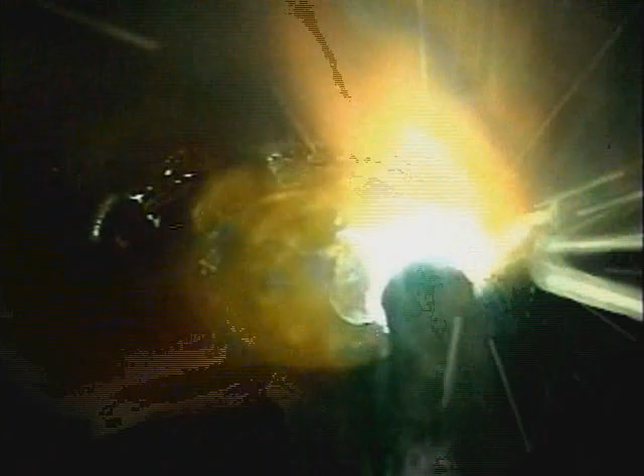From fabrication and repair shops to backyard garages, arc welding is one of the most common and versatile methods of joining metal. This is the SMAW, or shielded metal arc welding process.

Electric current from a welding machine produces an arc between the base metal and a consumable electrode, which is the welding rod. That arc burns the flux coating on the rod, creating gases that shield the weld area from coming in contact with oxygen in the air.

The gases surrounding the arc are superheated, causing the base metal to melt, while the filler metal from the rod is being deposited into the molten puddle.

Whether you're learning to weld to build something or make repairs, the first step is to learn how to consistently run a good weld bead. Before we start burning rod, though, there are a few things you should know about the equipment we'll be using. So let's begin with the welding machines.

The job of a welding machine is fairly simple, and that is to provide a steady, controllable current to the electrode. Regardless of the size or shape, welding machines will provide either alternating current or direct current to the electrode. And this little machine gives you the choice of either AC or DC.

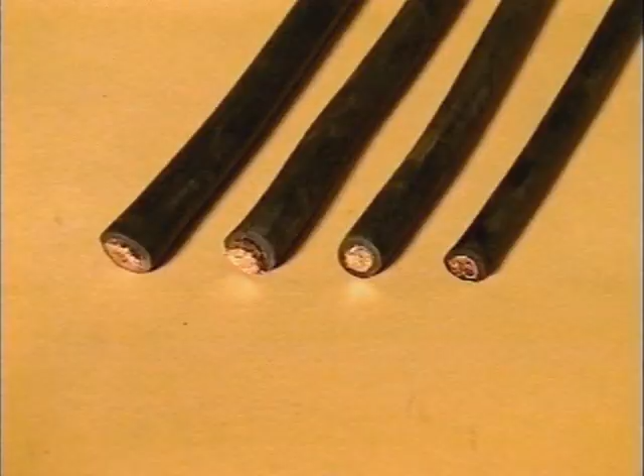Welding leads are insulated copper wire and come in sizes like a number 4, 2, 1, and single aught. The larger the number, the smaller the diameter. The size welding lead you need to use depends on how many amps you'll be using and how long the lead is. And welding supply stores have charts to determine the size lead you need to use.

On the end of the main lead, I use a quick connect with about 15 feet of number 4 lead and the electrode holder. This is called a whip. The smaller lead is a little more flexible and easier to deal with.

This is a 200 amp electrode holder. Larger ones like 250 or 300 amp are available if you're mainly using big rods with high amperage settings. But for general use, the 200 amp is more comfortable. And I usually call this the stinger.

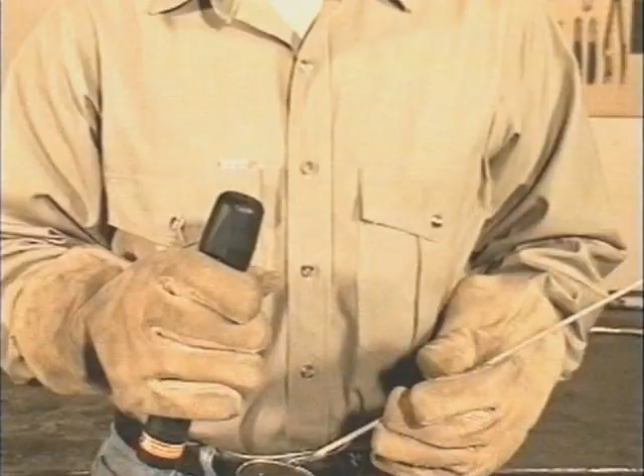Another type of electrode holder is available where you stick the rod in and twist the handle. If you need the rod at a different angle, you can just bend it. You also need a ground clamp, and I use a quick connect here too, in case I need to add more lead.

Now, the light from arc welding is extremely bright. You need filter lenses both to be able to see the molten weld puddle and to protect your eyes from getting burned. These are typically available from a number 8 to a number 14. The lower the number, the lighter the lens. From what I can tell, some people are more sensitive to this light than others.

A number 8 filter lens is way too light. Industry recommends a number 10, and I use a number 9. The lens has to be dark enough to protect your eyes, but light enough so you can clearly see the weld puddle. If you're welding with big rods using high amperage, you may want a shade darker lens than normal. And if this filter lens gets chipped or cracked, replace it.

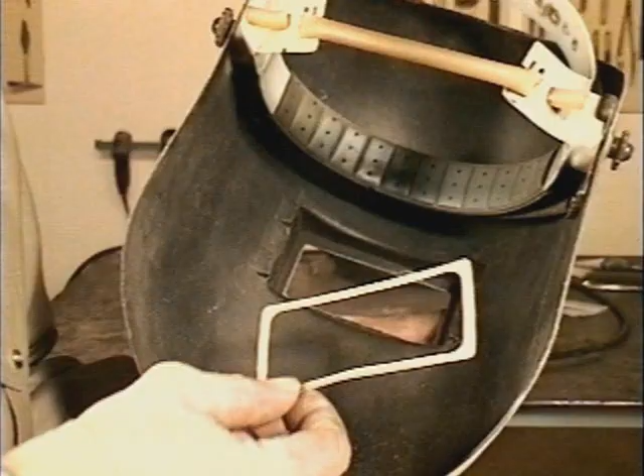To protect the filter lens from sparks or getting scratched, I use clear plastic lenses in front and in back. There's a gasket that goes in first to seal the lenses, and everything's held in place with a clip. After you install the lenses, hold the hood up to a light and check for leaks around the edges.

When you start welding, check it again. If any light from the arc is leaking around the edges of the lenses, it'll burn your eyes for sure. Also, replace the clear lenses when they get dirty or scratched. Having a clean lens makes a big difference in allowing you to clearly see the weld puddle.

Okay, the last thing we need are welding rods. So let's take a look at some of the common ones. Some of the more common welding rods for carbon steel are E6010, 6011, 6013, and 7018. And the numbers are written right on the rods.

These numbers actually mean something, so let's take a look at E6010. The E designates an arc welding electrode. The first two numbers, in this case 60, indicate that the filler metal has a tensile strength of 60,000 pounds per square inch. Depending on certain conditions of the weld, you may get a little more or less, but it'll be close to that. The 70 in 7018 indicates 70,000 pounds per square inch. So the first two numbers indicate tensile strength, and tensile strength is the force it takes to pull it apart.

The third number indicates the position the rod can be used in. A number 1 shows that the weld puddle solidifies quick enough so this rod can be used in any position: flat, vertical, horizontal, or overhead. A number 2, like in 7024, indicates that the molten puddle remains so fluid this rod can only be used in the flat position or for a horizontal fillet, which is more or less flat.

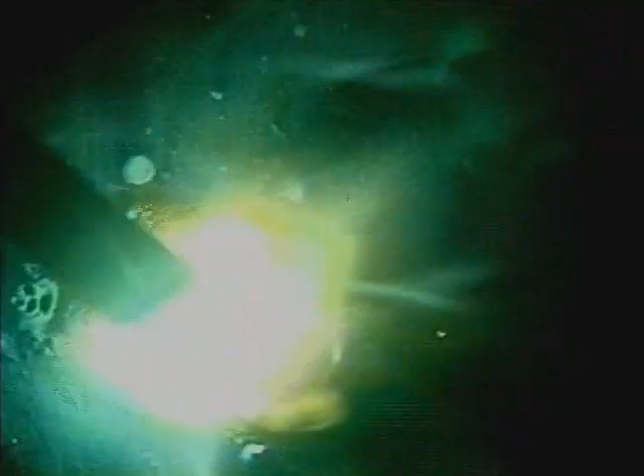The last two numbers together, here it's a 10, indicate the composition of the flux coating. And this flux is what makes the whole arc welding process possible. As it burns, a gas is created that purges the weld puddle, keeping the oxygen in the air from mixing with the molten metal, which could cause gas pockets in the weld bead called porosity. The flux also helps stabilize the arc, and it lifts impurities from the molten metal. When the flux cools, it forms a slag coating over the hot weld bead, providing more protection from the air.

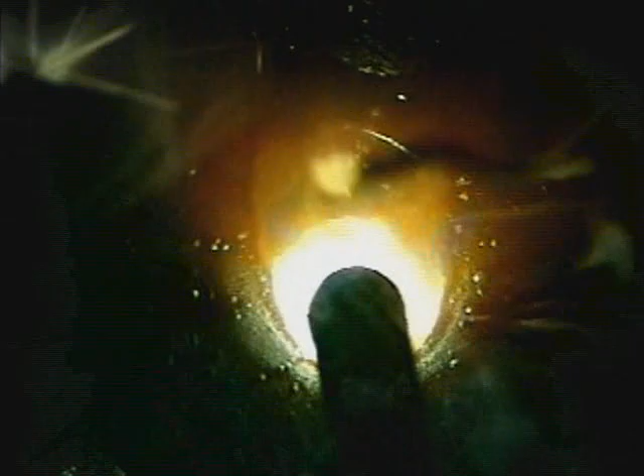There isn't a magic welding rod that just does everything. You may find one that you like to use, and that produces good results. But basically, welding rods can be put into one of two groups: fast freeze or filler. The fast freeze rods, 6010 and 6011, have a strong arc force that provides deep penetration. A light flux coating makes the molten weld puddle clearly visible, and the weld puddle solidifies relatively quick, leaving distinct ripples in the finished weld bead.

Filler rods, 6013, 7018, and 7024, don't penetrate as deep. They build up weld bead. A heavier flux coating covers the weld puddle, keeping it more fluid, allowing for a smoother finished weld bead.

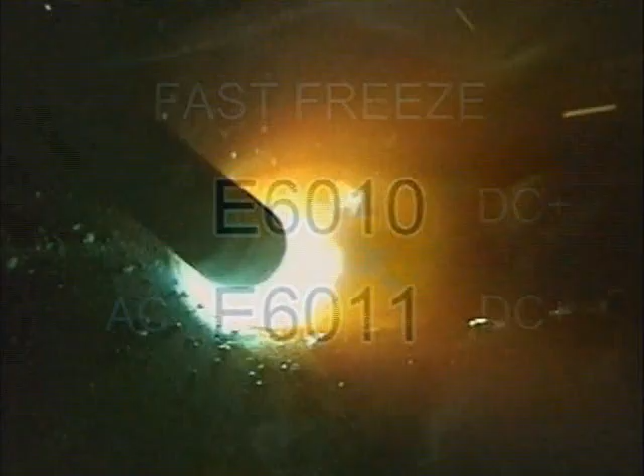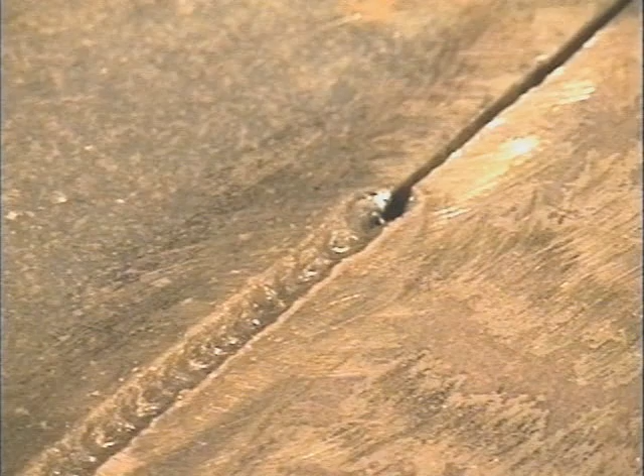So where exactly do you use these different welding rods? 6010 is used strictly on DC plus and 6011 on AC or DC plus. The strong arc force of these rods can blow off rust and paint, making these a good choice for repairs or modifications where the metal can't be completely cleaned. Also, these rods are often used as a first pass to provide deep penetration or to fill gaps in fit-ups that are less than perfect, then covered with a filler rod.

6013 was actually designed for high-speed sheet metal welding on DC-, but these rods can also be used on AC or DC+ for general purpose welding and light fabrication. With stabilizers in the flux, 6013 is probably the easiest of all the rods to use, and it produces a smooth finished weld bead.

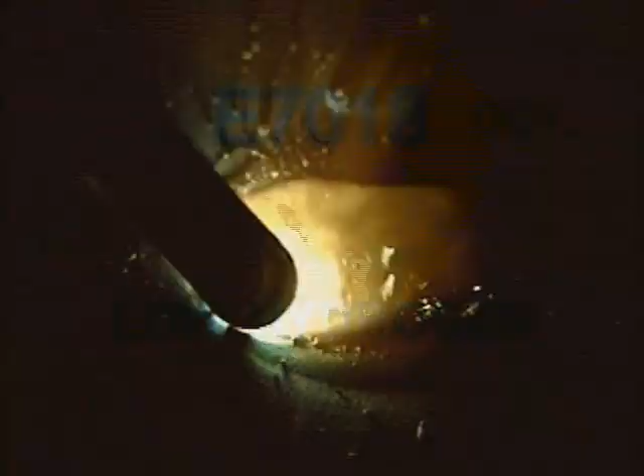7018 is a low hydrogen rod with iron powder in the flux. It's generally used on DC+, and an AC 7018 is also available. These produce the highest quality welds and were developed for situations where there's extreme stress on the weld joint. It can be used to weld some of the harder low alloy steels and cast steels, and when making heavier welds, the low hydrogen characteristics prevent the weld from cracking because of the expansion and contraction of the metal. Iron powder in the flux provides a high filler metal deposit rate, which means you can put more metal down faster. 7018 produces a smooth finished weld bead, but does require clean metal and a well-prepared joint.

7024 was used extensively in fabrication before wire feed. A heavy flux coating produces an extremely smooth weld bead, but these rods do require clean metal and a slightly higher amperage setting. 7024 can be used on DC+ or AC, and the 2 does indicate that this rod can only be used in the flat position.

6010, 6011, 6013, and 7018 are common rods and should be available everywhere. There are other welding rods, and they'll either be a fast freeze or a filler, with a different tensile strength, a slightly different flux covering, and usually designed for a specific purpose. Now, each of these rods has distinct characteristics, but there are some basic fundamentals that are common to all of arc welding. We'll start with the fast freeze type rods because the light flux allows you to see the molten weld puddle clearly.

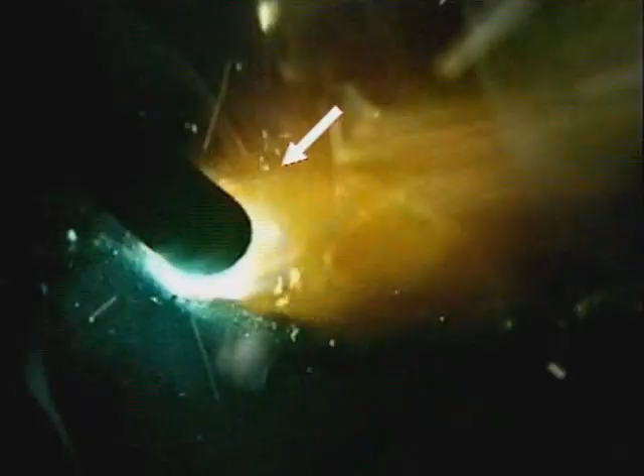Let's start by watching a weld, and I'll try and describe what to look for. After scratching the rod against the metal to make contact, the tip is held about 1/8 of an inch or 3 millimeters off the surface. This creates a gap for the arc to cross, and that's where the bright light comes from. While you're welding, don't watch the light. Look past it, through the smoke and sparks, and focus on the molten puddle of metal behind the rod. Welding takes a little practice, but it's not very difficult.

Let's go through this step by step. First of all, you need to pay attention. This is ready to go. Anytime the tip of the rod touches the metal, it will arc. Okay, you want to get comfortable. Welding rods burn for about a minute, and it's a long ways out to the tip of the rod. So get comfortable and relax. Rest your arm on the table and use both hands on the stinger so you can be as steady as possible. When you're all set, either reach up and flip your hood down, or you can adjust the knobs on the side to flip the hood down with a nod.

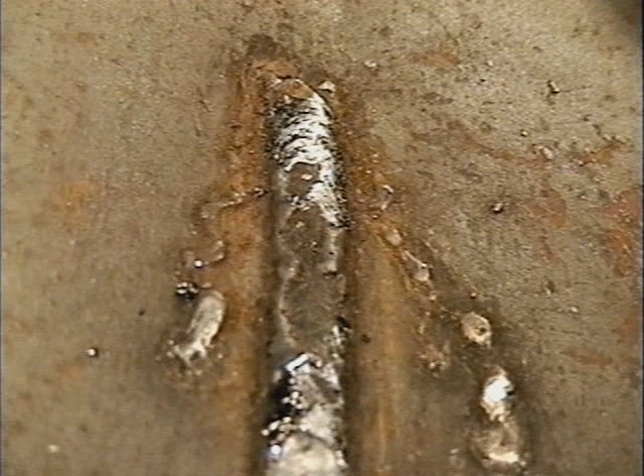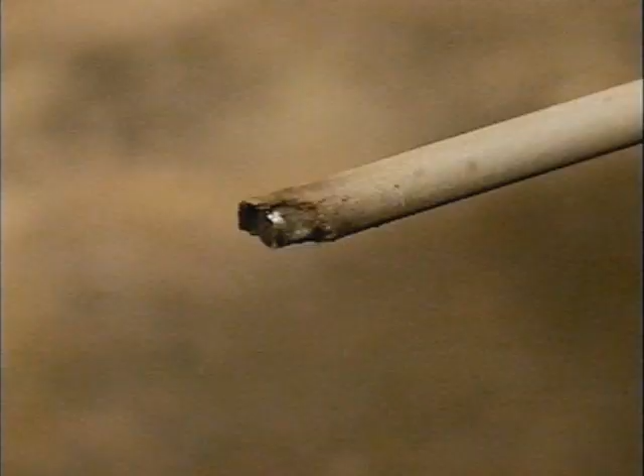Starting the arc is like lighting a match. Drag the rod right against the metal. When it lights, bring the tip up and move back to the start. A scratch start gets the flux burning, forming the gases that purge air away from the molten puddle. To avoid leaving arc burns all over the metal, try to scratch right where you intend to weld. I usually hold the stinger with my thumb on the release lever. If the rod ever sticks, just open the stinger, then go back and break the rod off. If you're relighting a rod, the flux may be broken off a little at the tip. A scratch start will burn off that tip before you start depositing metal.

Once the rod is burning, you need to start the puddle, giving the molten filler metal a little extra time to fuse to the base metal. This doesn't take long, only 2 or 3 little circles. Also, as the weld progresses, the base metal will heat up, causing the molten puddle to spread out. Start the puddle wide enough to keep the weld bead a uniform width.

During the weld, the tip of the rod is held up off the metal. This is called the arc gap. Having control of this arc gap is one of the first and may be the most important things you need to learn. As you're moving along to build the weld bead, the rod is being consumed, so you also have to be moving in. And the whole time you need to maintain a constant, uniform gap between the tip of the rod and the base metal. If the tip of the rod is jammed right down on the metal, the arc doesn't have time to heat up the base metal.

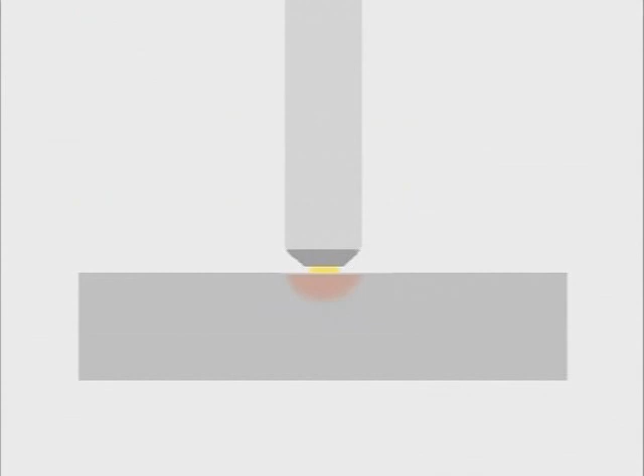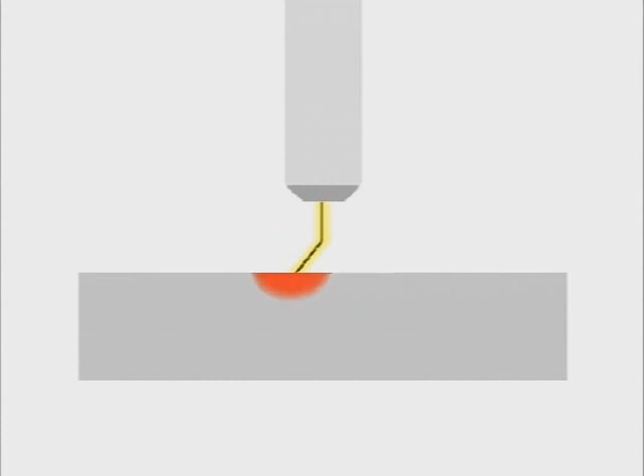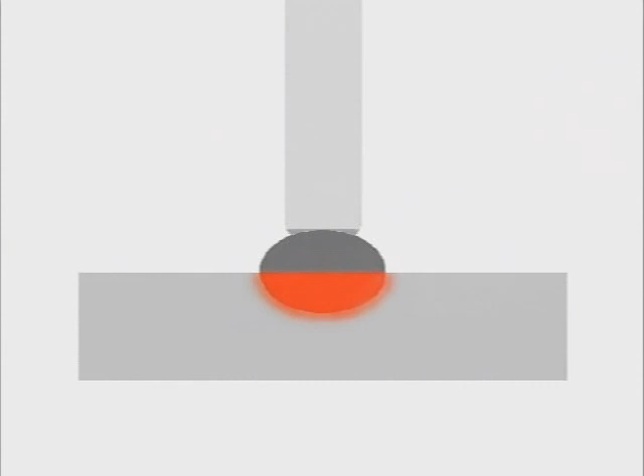The weld bead kind of squirts out the back, not tying in well on the sides. If the arc gap is too long, the arc itself can jump around. Penetration will vary and you lose control of how the filler metal is deposited. Maintaining a constant arc gap is the first step to controlling the molten puddle and producing a uniform weld bead.

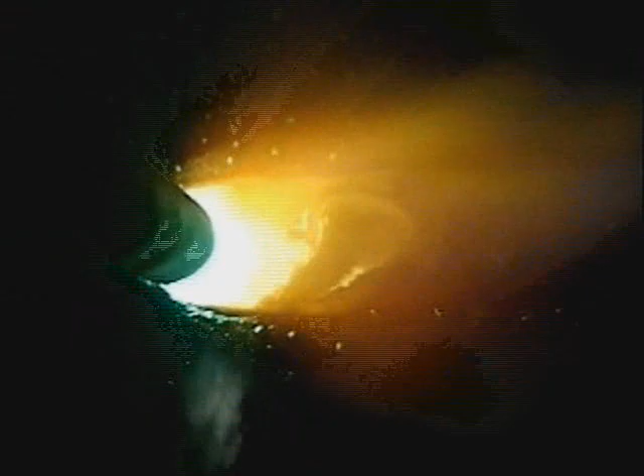When the arc crosses the gap, it melts the base metal, forming a molten puddle. That arc stream also carries the filler metal from the rod into the puddle.

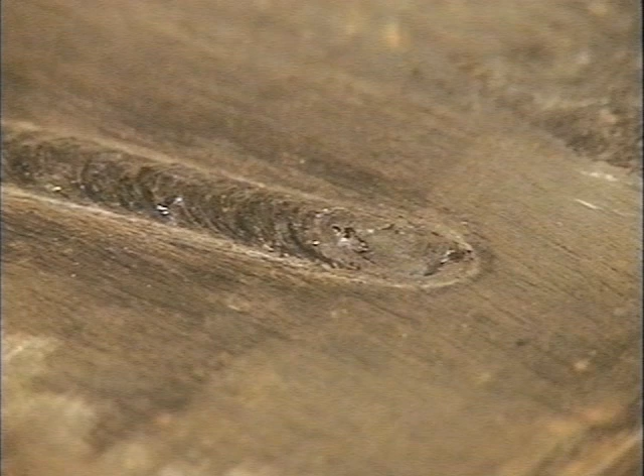This is a 6010 weld bead that I pulled out of quickly. The leading edge of the puddle was actually below the surface of the metal. The strong arc force of 6010 and 6011 penetrates deep into the base metal and pushes the molten puddle back, building up weld bead. While you're welding, watch the sides, right where the weld buildup meets the surface of the base metal. For building up weld bead, either a circular or zigzag motion is commonly used.

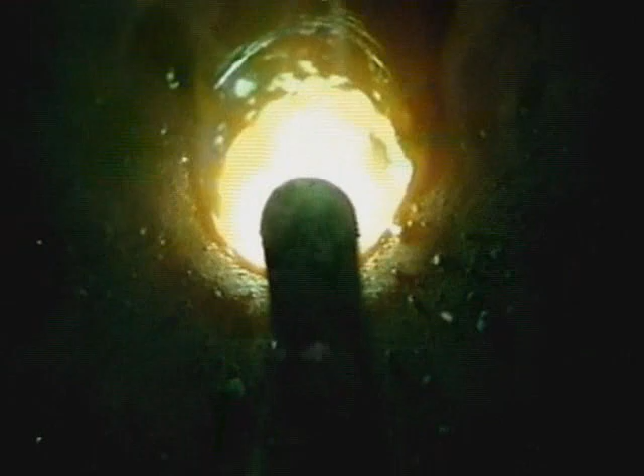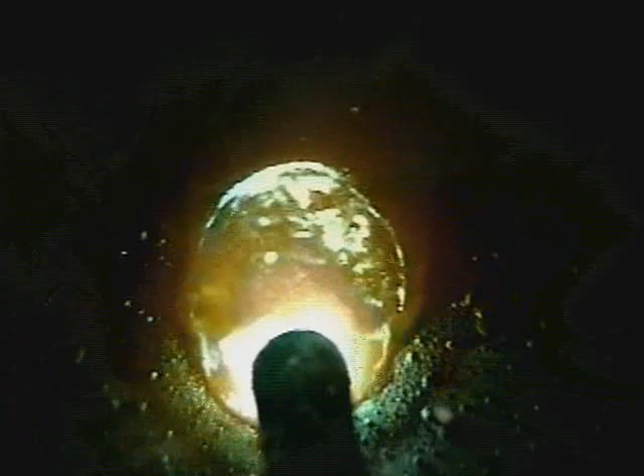With a circular motion, as you ease the puddle over, watch the edge. When you bring it across, watch the weld buildup, then the other side, and just ease the puddle around and around. A side-to-side or zigzag motion will produce nearly the same weld bead. Watch the outside edge, the weld buildup, and the outside edge every time you cross.

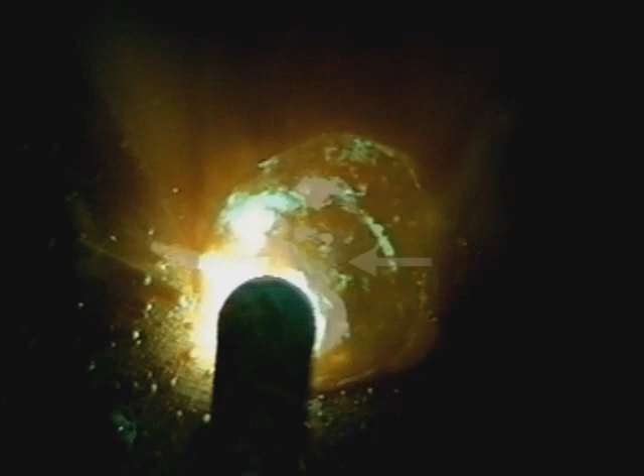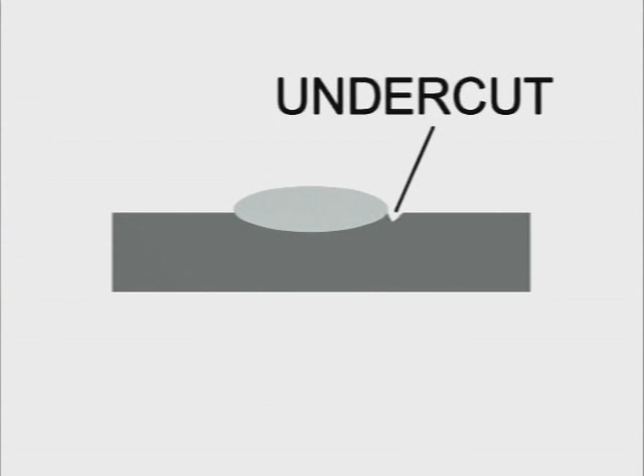Something you want to keep in mind is that molten metal will follow the heat. Whenever you move the puddle across, while you are adding filler metal from the rod, molten metal is also flowing from the side. If enough metal isn't put back there when you come around again, you'll leave undercut. Undercut is a void or groove along the edge of the weld bead that's below the surface of the base metal. You can avoid this by always watching the outside edges to make sure the puddle is filling in and tying in at the surface.

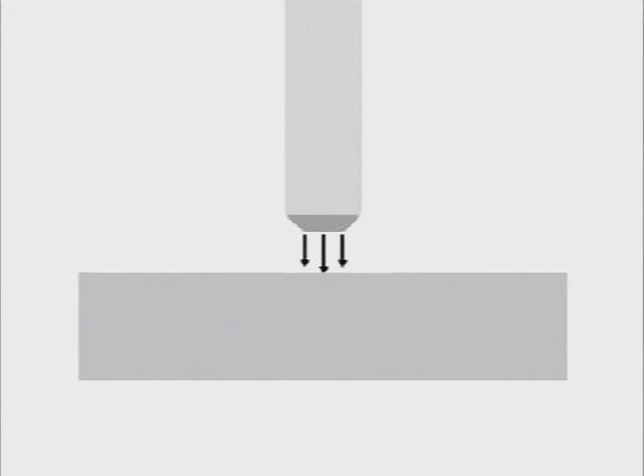There's an arc force at the end of this rod that we can use to help manipulate the weld puddle by angling the rod. Think of it more like pushing the puddle instead of dragging it. Generally speaking, the straighter up and down you hold the rod, the less weld buildup. As you angle the rod, the more the weld bead will stack up. When the rod is held straight up and down, all the heat is concentrated right under the rod, and the arc force drives the puddle down.

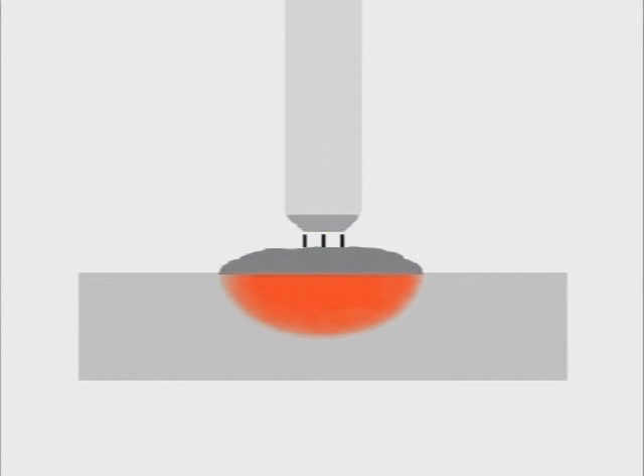This results in deep penetration and spreads the puddle out for a flatter weld bead. As the rod is angled, the arc force is directed more to the back of the puddle, allowing the weld to build up. If the rod is angled too low, the arc is directed right where you're trying to build weld, making the puddle hard to control.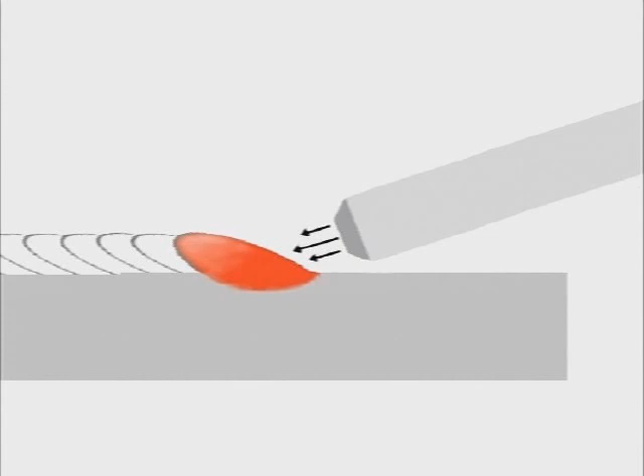You will run into situations where you may want to flatten out the weld, or you'll need to push the puddle back more, so you'll use different rod angles. When you're starting out, an angle somewhere between 45 degrees and straight up and down is comfortable, allows a good view of the puddle, and works well for building weld bead.

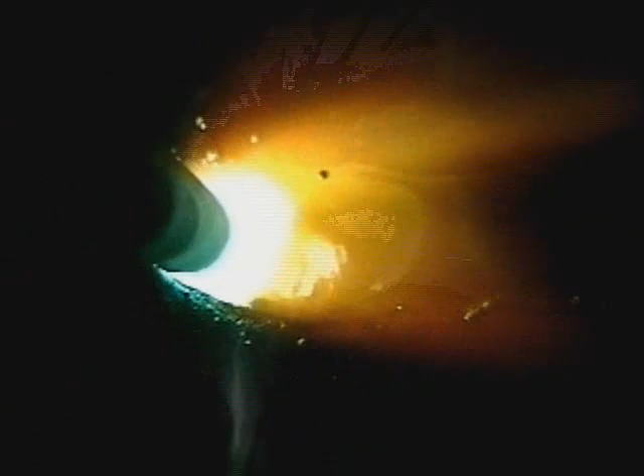The rod size is the diameter measurement of the metal in the electrode. Common sizes are 3/32, 1/8, and 5/32. Most welding rod size charts, where they give the metal thickness to the rod size and amperage setting, are generally from the point of view of maximum weld in minimum amount of time, often not taking into account the welder's ability or different welding situations.

You can always use a smaller diameter rod for better control. It just takes a little longer to build up weld bead. This is a 1/8 inch E6010 electrode, and this is the most common size used. The manufacturer's recommended amperage setting is from 75 to 130 amps. They're saying this rod will work over a 55 amp range.

The specific amperage setting is considered a variable and depends on metal thickness, position of the weld, and the welder's ability. The whole purpose in arc welding is to get the base metals hot enough to melt, forming a molten puddle. If the amperage is set too low, the base metal doesn't get hot enough, and the puddle looks like it's following the rod around.

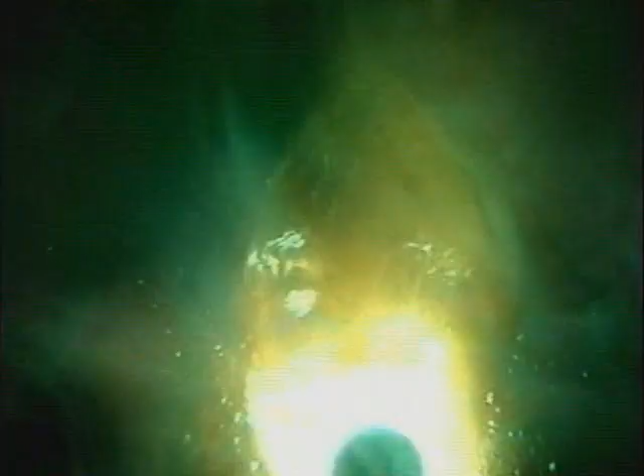If the amperage is set too high, the base metal gets too hot. The stronger arc force gouges deep into the base metal and pushes the puddle back. When the amperage is set about right, the puddle will spread out and the outside edges tie in immediately. You can ease the puddle around, kind of pushing it with the movement of the rod.

Depending on each welding situation, the amperage setting can change. Thicker metal dissipates the heat, so you need a little more amperage. Thinner metal will get hot fast, so you can use a little lower amperage. The final amperage setting is determined by what the molten puddle is doing. You do need a place to start, so try about the middle of the manufacturer's recommended range, and don't be afraid to go up or down a little bit.

Welding really is about the temperature of the base metal, so we can't talk about the amperage setting without looking at the speed of progression, or travel speed. The faster you move, the less time heat is put to the base metal, so it stays cooler. When you move slower, you're putting heat to it for a longer time, so the base metal gets hotter. When you move too fast, the metal doesn't have time to heat up, so the weld bead just skates across, not getting any penetration.

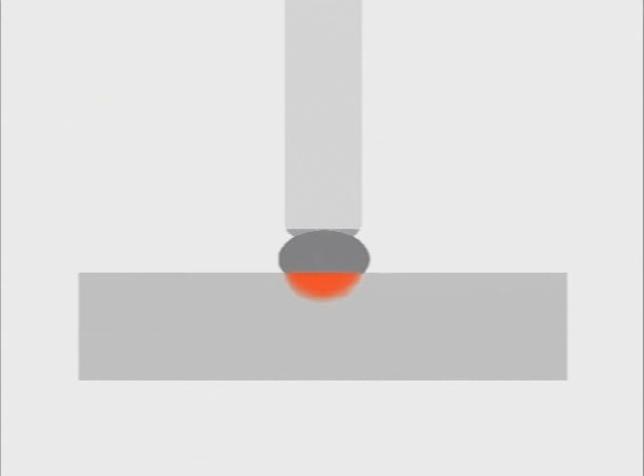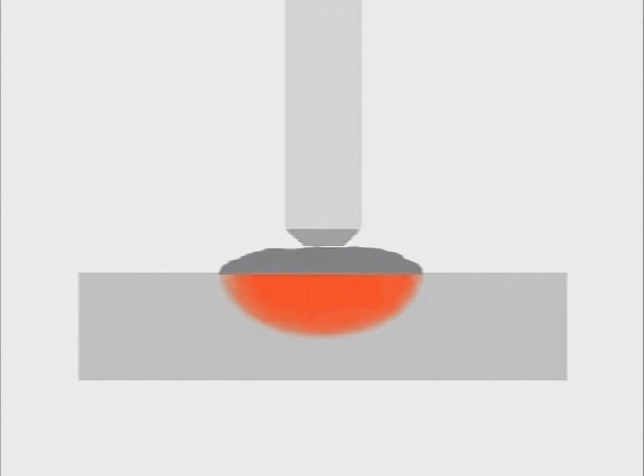If you move too slow, the metal gets extremely hot, causing the puddle to spread out, making it hard to control. When the travel speed and amperage setting match, the puddle spreads out, but it's still controllable. The sides tie in and the weld builds uniformly.

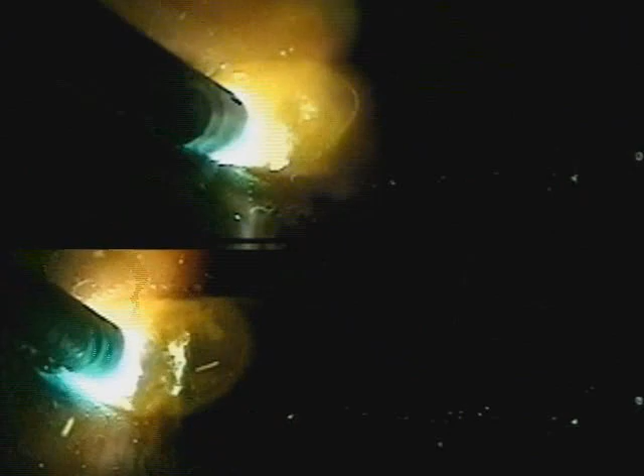As you gain more control of the rod, try using a slightly higher amperage setting and increasing the speed of travel. The higher amperage setting provides better penetration and a smoother finished weld bead. Try to weld as hot as you can control the molten puddle.

To finish a weld bead, add a little extra metal before you pull out, to avoid leaving a crater that's below flush with the surface of the base metal. Circle the rod once or twice, then bring the rod up and back over the weld.

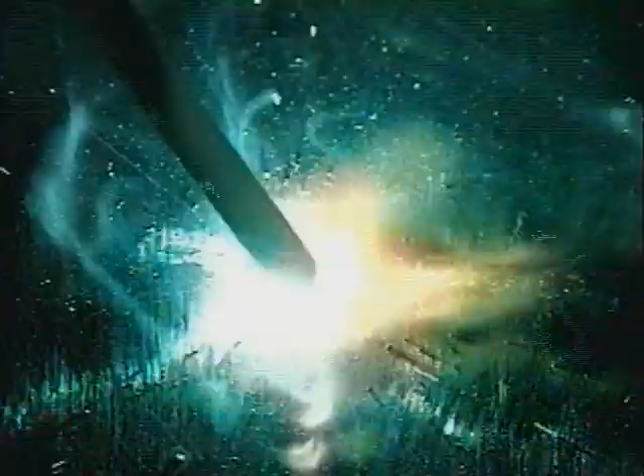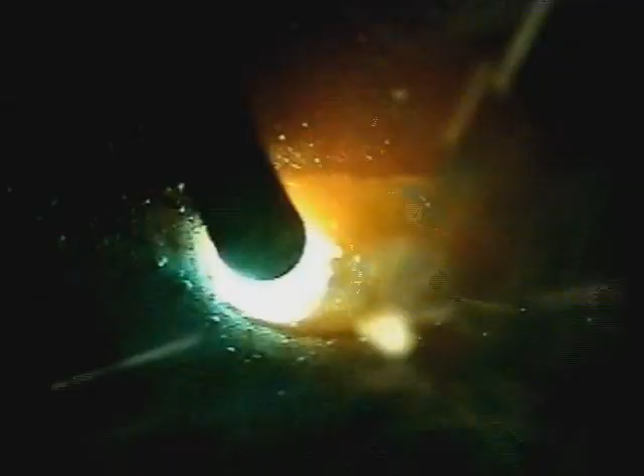While different rods may not look quite the same, these are the basic steps for all welding rods. Scratch to get the arc going. Start the puddle wide enough to keep the weld a uniform width. Maintain a uniform arc gap with an amperage setting high enough to let the puddle spread out. Ease the puddle around using the force of the arc and watch the sides and the weld build up. Add some filler metal before pulling out over the weld bead. That's about all there is to it.

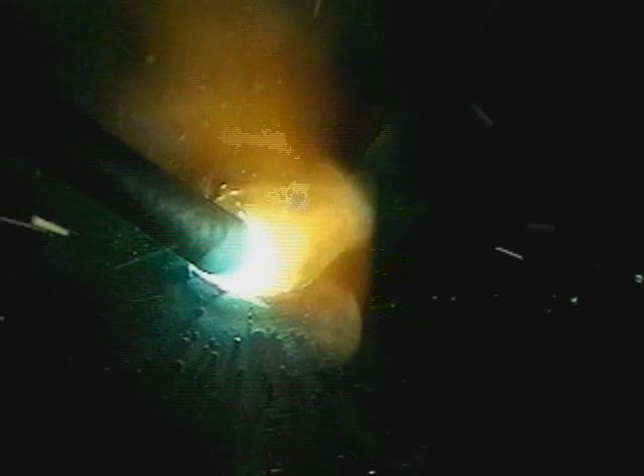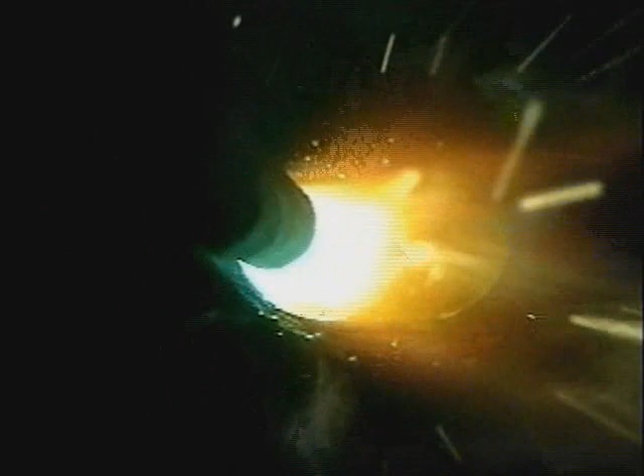For 60-10 in the flat position, try a circular motion and angle the rod to build up weld. Watch the molten puddle, not the light. Keep the circles tight for a smoother weld bead. A zigzag motion will produce about the same weld. Watch the edges to make sure they're filling in and ease the puddle back and forth.

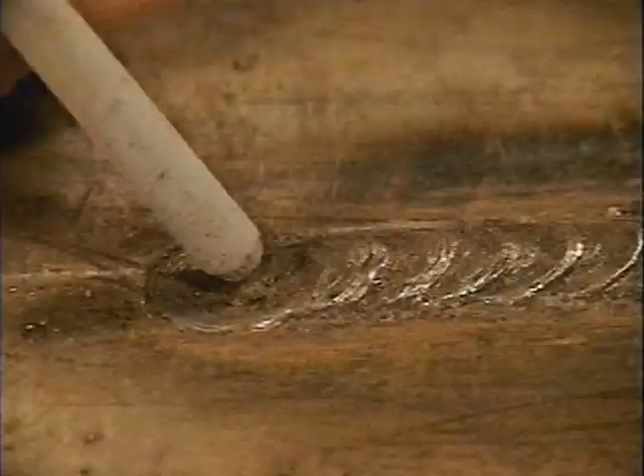Because of the strong arc force and light slag, you can also use a whip or step motion, and this is what makes the fast freeze rod so versatile. The tip of the rod is moved back so the arc is actually brought out of the puddle. Then molten metal is pushed back in.

With the step motion, watch both sides and the weld build up every time you push the puddle in. This kind of rod movement can be used for deep penetration by digging down on the backstroke, then filling the gouge in.

On thinner metals, where you don't need a lot of penetration, you can puddle, then long arc to let the weld bead cool, and puddle again. The thinner the metal, the faster this goes.

The step motion can also be used to fill gaps in poorly fit joints. Keep the rod deep in the gap and bring it back, allowing the metal to cool. Then push a little more metal in to fill the gap and let it cool again. The step motion may not always look real slick, but it's usually covered with another pass.

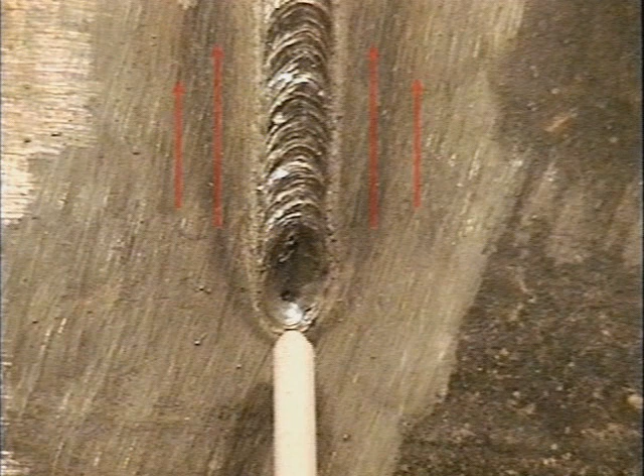So far, we've been welding in the flat position. For a vertical with 60-10, you can run either uphill or downhill. Downhill is easier, but there's less penetration and weld buildup. Because heat rises, you're welding away from the heated metal, so you can use a slightly higher amperage setting. Watch the sides and the weld buildup.

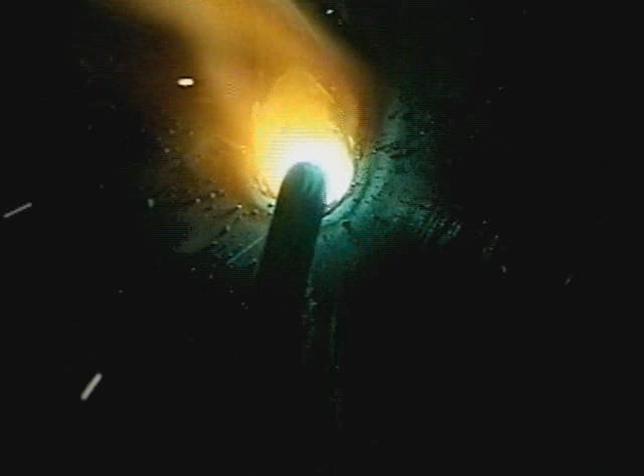Try a circular, zigzag, or step motion and angle the rod up a little so the force of the arc helps hold the puddle up. With a circular motion, keep a steady arc gap and ease the puddle around. Move fast enough to stay ahead of the molten puddle. If the puddle wants to drip down, try moving faster, or maybe even a slightly higher amperage setting.

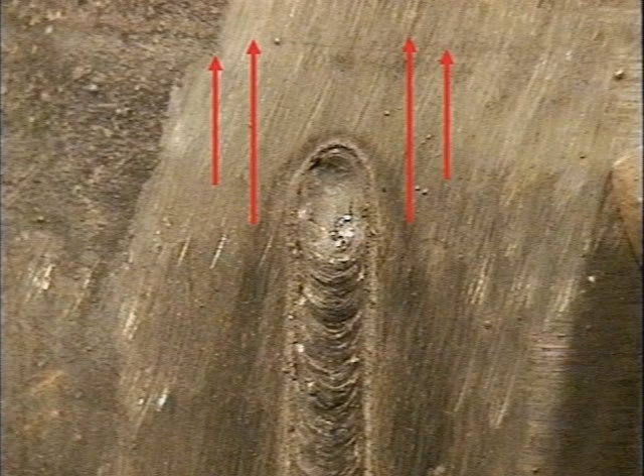When you weld uphill, you'll be welding into the heated metal, so turn the amperage down a little. Angle the rod up so the force of the arc doesn't blow the puddle out. An uphill weld really gouges into the base metal, making undercutting a potential problem. So pay particular attention to the sides of the puddle and watch the weld buildup underneath the rod.

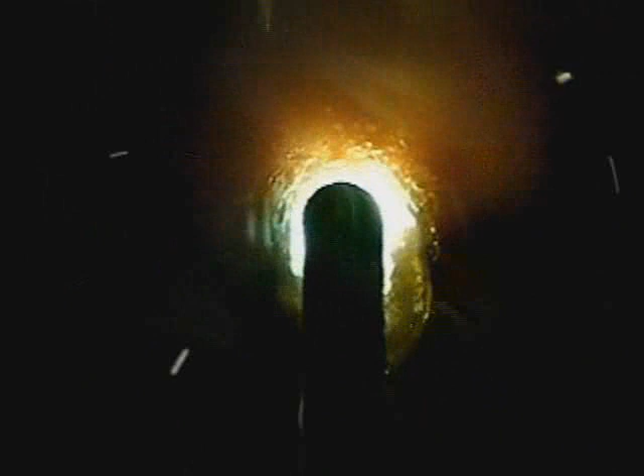If the base metal gets too hot, the puddle may fall out, or you might burn a hole right through the metal. Mess with the amperage setting and your travel speed until you can carry that puddle right uphill.

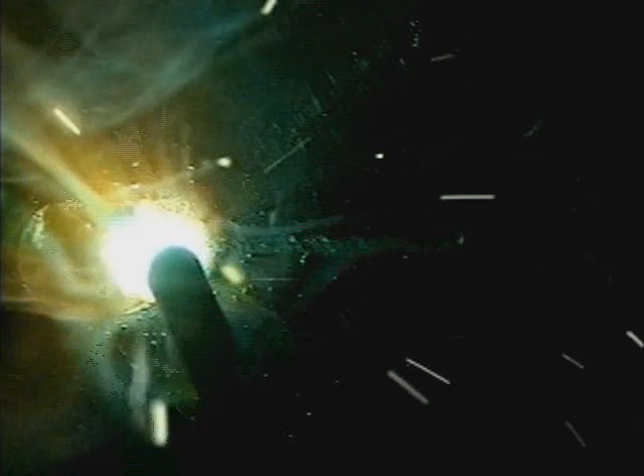A horizontal weld is a cross, and you want to angle the rod to push the puddle up. Keep the rod nearly perpendicular to the metal or angle into the weld a little bit. If you angle the rod too far, the arc force can blow the puddle out. Using a circular motion, keep a steady arc gap and just ease the puddle around.

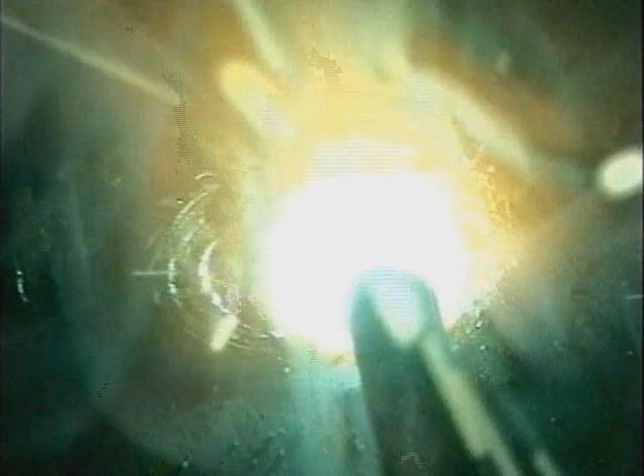Every time you bring the rod down, the molten metal will follow the heat. Make sure you push the puddle up and watch the top side. If the bead is wanting to sag down, try a faster travel speed to keep the base metal cooler.

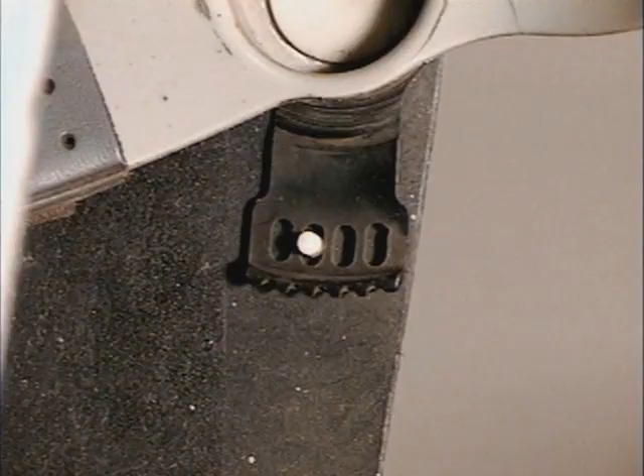That leaves us with overhead, straight up and down. Overhead is about the same as welding flat, just a little more awkward. The real challenge is to find a comfortable position so you can keep the rod steady. Your welding hood should have an adjuster to help hold it up, so you don't have to bend your neck back so far.

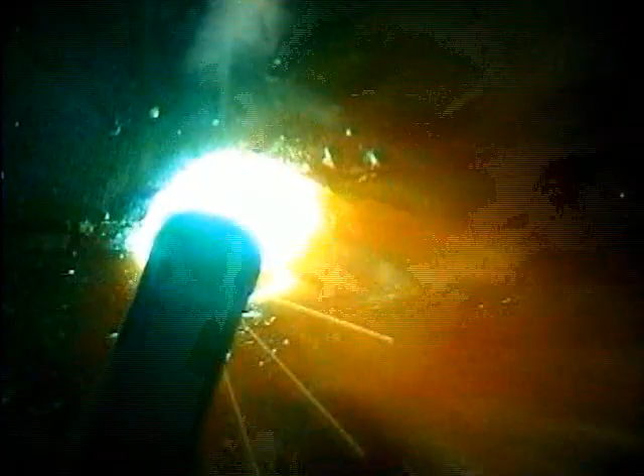Now, believe it or not, the molten puddle doesn't want to fall out. Unless you blow it out with the arc force, the molten metal wants to stay with the heat. It likes the heat. Hold the rod nearly straight up and down or angled slightly in the direction of travel, away from the weld. Try a circular motion and just make the puddle look the same as when you're welding flat. All the sparks will be coming your way, so wear protective clothing like a leather coat, some good gloves, and I like to cover my head with a hat. Getting burned is a little distracting when you're trying to run a good weld bead.

6010 and 6011 won't give you a smooth finished weld bead, but they do provide deep penetration in weld joints and when making repairs.

6013 welding rods were developed for welding sheet metal on DC minus. The rod is held perpendicular to the metal with a tight arc, and the travel speed is as fast as you can go without having the weld bead skip.

Today, 6013 is more often used for general purpose welding with AC or DC plus, and it is a good rod for the small, low amperage welding machines.

One of the first things you'll notice about 6013 is that there's a heavier slag coating on the weld bead. The slag even covers the top edge of the weld puddle. This keeps the puddle more fluid, helping to produce a smoother, finished weld bead.

Typically, 6013 is available in 3/32, 1/8, and 5/32. 1/8 is the most common size used, and try starting with an amperage setting around 130 amps on AC or 115 amps on DC.

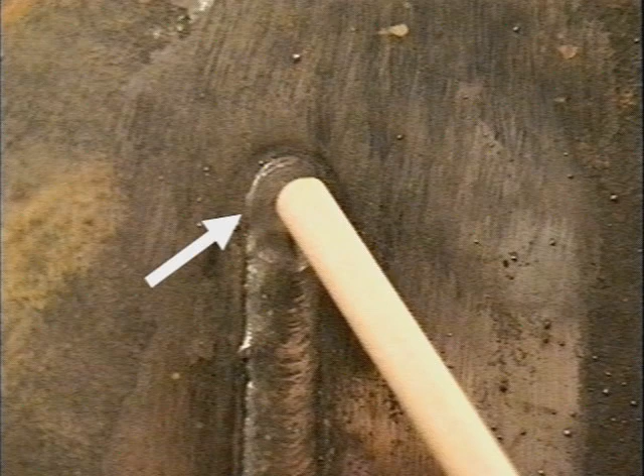Try using a side-to-side motion, moving up fast enough to keep the puddle from dripping down. Make sure the sides are filling in to avoid leaving undercut. To make a horizontal weld, angle the rod up to help push the puddle up.

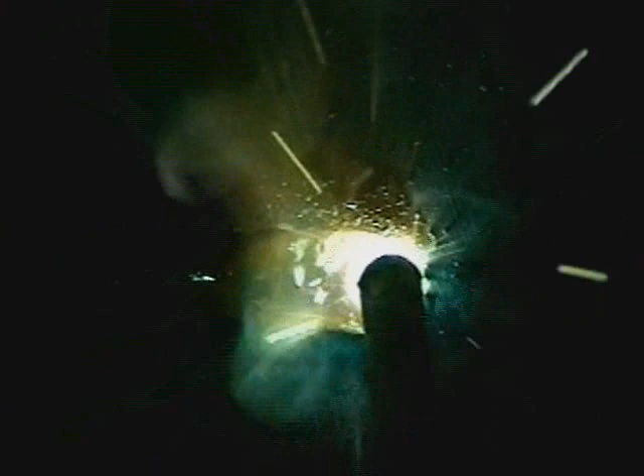Keep the rod nearly perpendicular to the metal, or angled back into the weld just a little. Maintain a short arc gap and constant travel speed to produce a smooth weld bead. The molten slag will run down, covering the bottom, but watch the top side of the puddle. Move fast enough to avoid excessive weld buildup.

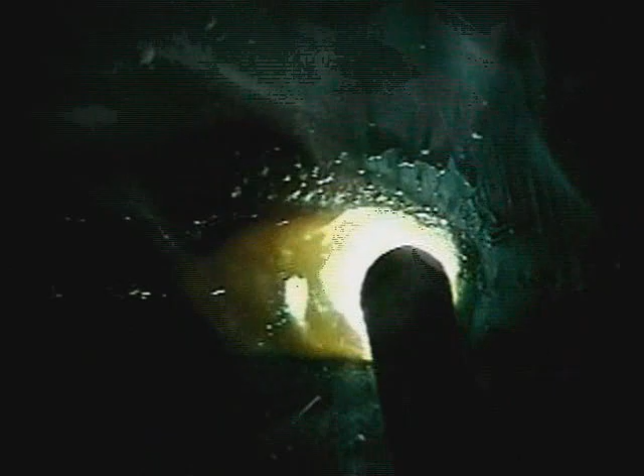While you're learning to weld horizontally, don't try to carry too much metal. Keep the weld bead small. If you need more weld, you can always run a second pass above the first one.

Overhead with 6013, like every other type of welding rod, is awkward. Hold the rod straight up, or, because of the mild arc force, you can angle it back into the weld a little bit, and try a slight circular motion. The heat of the weld is going straight up, right where you want it.

So if you can get in position to maintain a short arc gap and uniform travel speed, overhead will produce a good weld. 6013 is the favorite rod in many home shops. They're easy to light, they maintain the arc, and produce a good-looking finished weld bead.

7018 produces an extremely high-quality, good-looking weld bead. This is the rod to use for heavier fabrication and repair, or any situation where there's stress on the weld joint. These rods rely on a heavy slag coating to protect the molten weld puddle from coming in contact with oxygen in the air. This heavy slag makes 7018 run a little different than the other rods we've looked at.

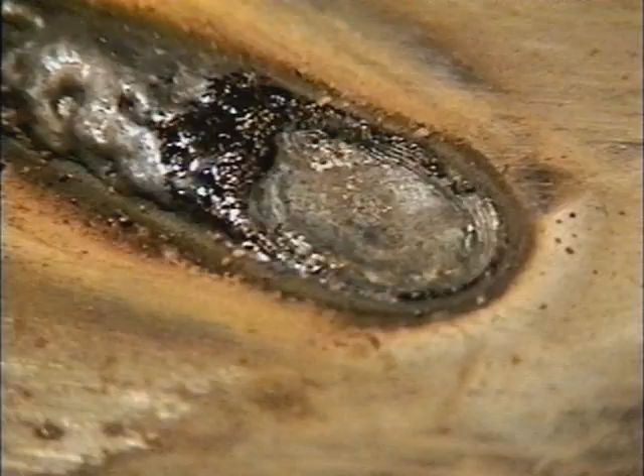With the fast freeze rods, 6010 and 6011, the molten metal in the weld puddle is completely visible. Slag covers the top edge of the molten puddle with 6013, but the filler metal and slag solidify pretty much at the same time. With 7018, the entire weld puddle is covered by molten slag. The filler metal actually solidifies underneath, while the slag stays molten on top.

If you keep in mind that what you see is molten slag, and understand what the metal is doing underneath, 7018 is fairly simple to use. And even though the metal is solidifying underneath, watching the molten slag behind the rod will give you an idea of the weld buildup.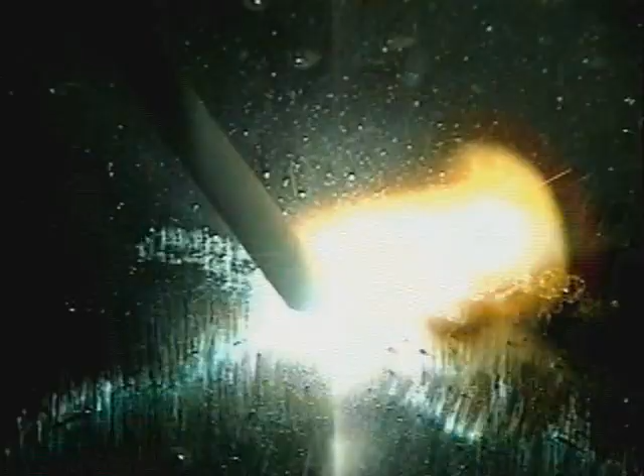7018 is a little more sensitive to arc gap and rod movement. Make sure you're comfortable so you can be as steady as possible. A scratch start will get the flux burning before you deposit any metal.

If you're relighting a rod, there's usually slag covering the tip. You may have to bump the rod to break that slag, then scratch to get going. Once the rod is lit, start the puddle.

Besides tying in and getting started wide enough, this gives a little extra time for the gases to cook out of the molten puddle. If you move too quick, gas pockets may cause voids in the weld bead called porosity.

Most times they're not even visible until you grind into the weld bead. Porosity can also be caused by welding on metal that's rusted, painted, or has any contaminants on it like oil or grease. 7018 does require clean metal.

After the puddle is started, try a little side-to-side motion, maintaining a constant short arc gap. In some situations, you can even lightly rest the rod on the metal. With a mild arc force and slag covering the puddle, you do want to avoid letting the rod burn up or pulling the rod away from the metal. You don't want to let that slag cool, so keep the arc in the puddle.

The typical rod sizes are 3/32, 1/8, and 5/32. Because the flux contains iron powder, which deposits more metal in the weld puddle, 7018 requires a little higher amperage, and these settings may vary up or down depending on metal thickness, weld position, and your ability to control the movement of the rod.

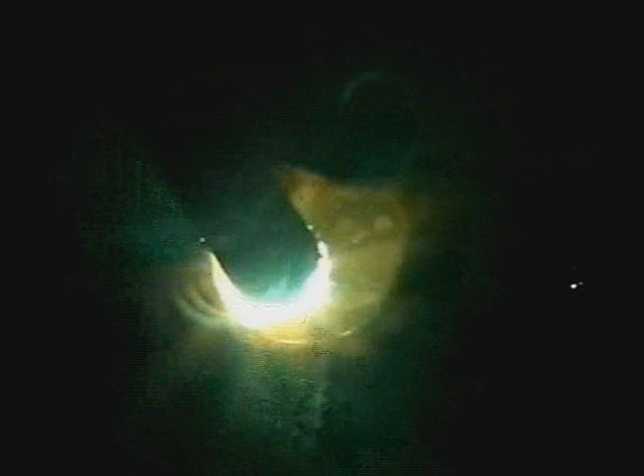With molten slag covering the entire puddle, you depend more on how the puddle acts than how the puddle looks. If the amperage is set too low for the conditions, the puddle won't spread out, taking longer to tie in on the sides. The rod might stick or go out.

If the amperage is set too high, the puddle is agitated and extremely fluid. Little balls of metal might dance off to the sides, causing excessive weld spatter. When the amperage is about right, the slag solidifies back from the rod. The sides tie in and you can ease the puddle side to side.

Here again, as you gain control of the arc gap, rod movement, and travel speed, you'll find that 7018 runs easier and cleaner with the amperage set a little to the hot side.

The angle of the rod not only affects how the filler metal is deposited, but how the molten slag will behave. If the rod is held straight up and down, the slag can get in front of the weld puddle. If the rod is laid too far down, the flux coating won't burn evenly and the rod may stick. When the rod is angled between 45 and 90 degrees, the slag is forced back where it belongs, over the molten filler metal.

Welding in the flat position is fairly simple. Remember to relax, get comfortable, and use two hands on the stinger. Try to maintain a short arc gap and constant travel speed. Watch the outside edges of the puddle to make sure they're fusing and staying even. Look behind the rod for an idea of the weld buildup.

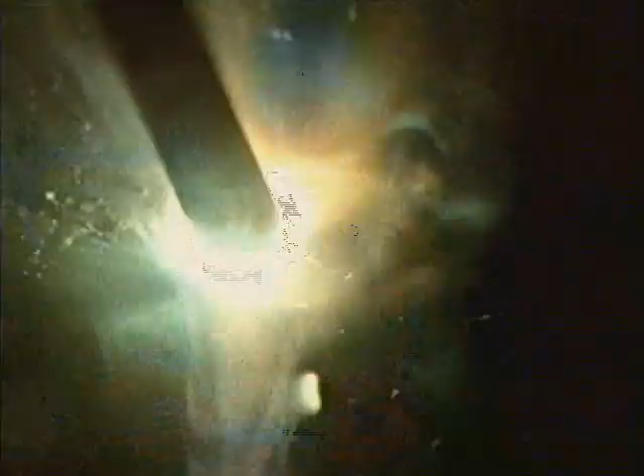In the flat position, even 5/32 rods are fairly easy to control if your welding machine can produce enough amperage and there's plenty of metal to carry the heat.

For a horizontal weld, we'll be welding across. If you're just starting out, try using a 3/32 rod. The smaller puddle is a little easier to control. Normally I weld from left to right because I can see the puddle better. For 7018 in a horizontal position, I move from right to left. You can weld in either direction, whichever is more comfortable.

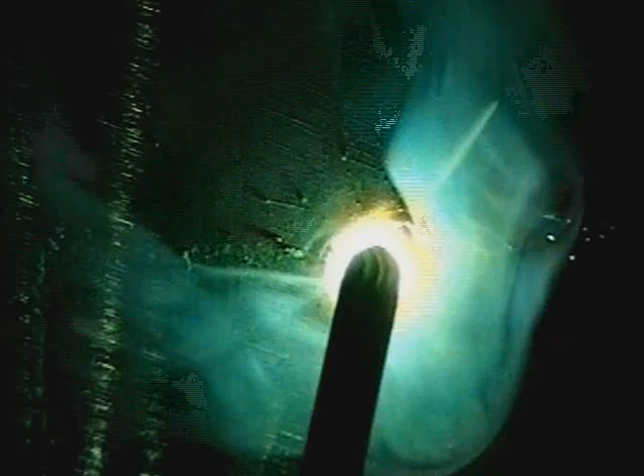Angle the rod up and back into the weld a little. The puddle is fluid, so keep moving to avoid excessive weld buildup. Molten slag will cover the bottom, but watch the top side to keep the bead straight and avoid undercut.

If the weld bead wants to sag, try increasing the travel speed. You want to go slow enough to let the molten metal fuse, but fast enough to keep the base metal from overheating, which causes the puddle to get more fluid and sag.

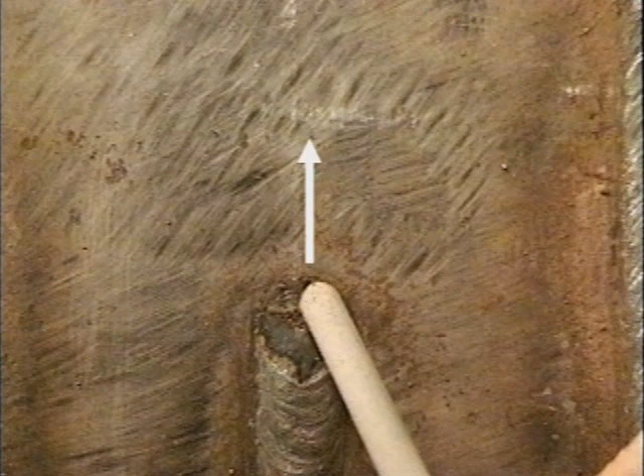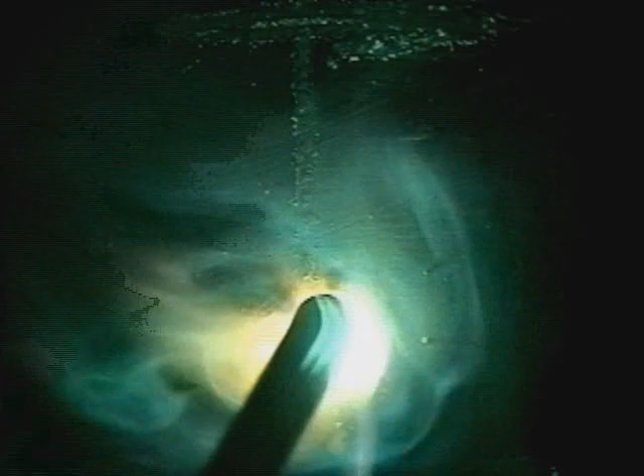Vertical welds with 7018 are made uphill. Start at the top and scratch down to where you want to start the puddle. You can run straight up or use a side-to-side movement. When I do this, it feels like there's a slight arc in the motion. Move across the center relatively quick. As soon as the puddle ties in on the side, cross back and keep on going.

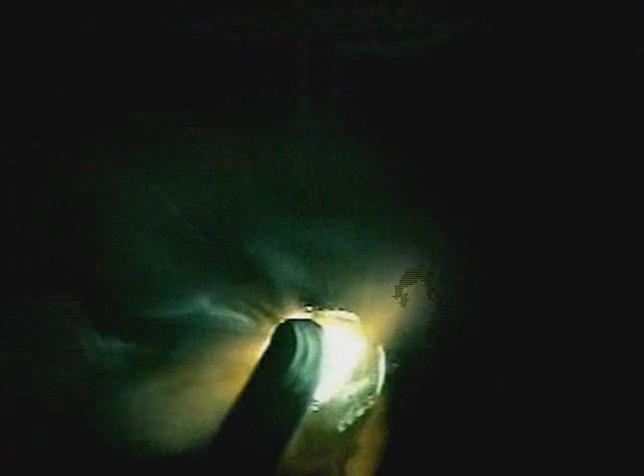The amperage setting and travel speed go hand in hand, especially when you're going uphill. Maintain a constant short arc gap. Don't let the rod burn away, and don't jam the rod into the puddle. As you gain experience, you can carry more metal, but try starting out with a 3/32 rod and keep moving. You don't want the base metal overheating, which is the main reason the puddle falls out.

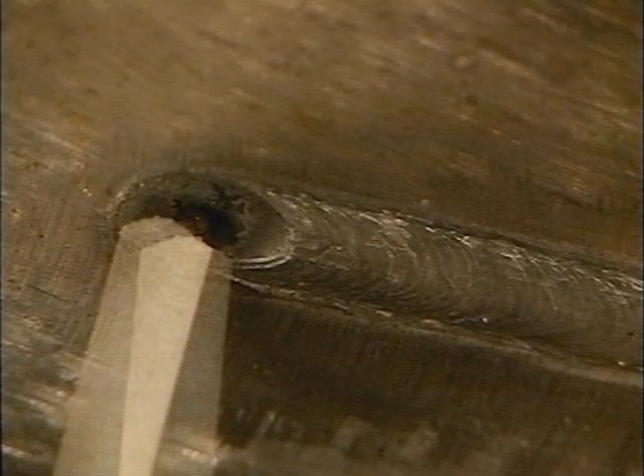Overhead with 7018 produces an excellent weld. The heat is going right where you want it. Try about the same amperage you'd use for welding flat and hold the rod nearly straight up and down or angled slightly into the weld. You can run straight or try a little side-to-side motion to carry more metal, and you can carry quite a bit of metal overhead. Get comfortable and be creative if you have to. When you can control the rod movement, that metal will stay up there.

However, because the slag remains molten longer, it can drip. I usually wear a leather welding jacket for overheads since you'll be right underneath the weld. 7018 takes a little more practice, but it's well worth the time to learn how to use this rod.

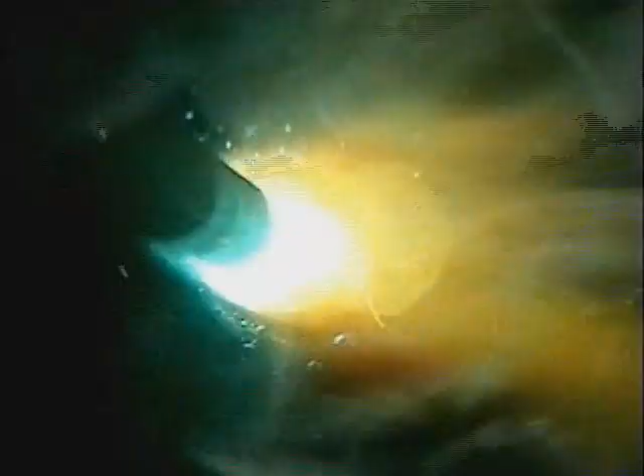Well, that's about it. I hope I've given you an idea of what to do and what to look for to run good weld beads. As you're welding, concentrate the whole time you're burning that rod and focus on the molten puddle. Do whatever it takes to make that puddle do what you want it to do. There isn't anything automatic about arc welding. You need to put that metal where it belongs and learn to see the weld as it's going in.

When you're done, inspect every weld you make. If what you did worked, do it again. If it didn't work, try something different. A smooth, uniform weld bead will come with practice, but you do want the sides of the weld to be tied in nicely to the base metal. If the sides aren't tied in, you may be moving too fast, jamming the rod into the puddle, or running too low of an amperage setting.

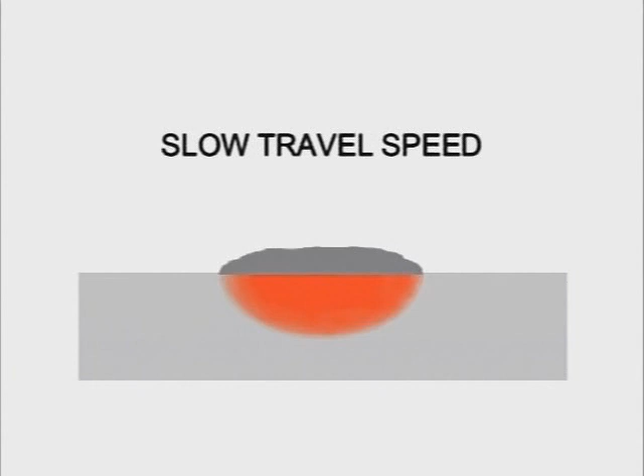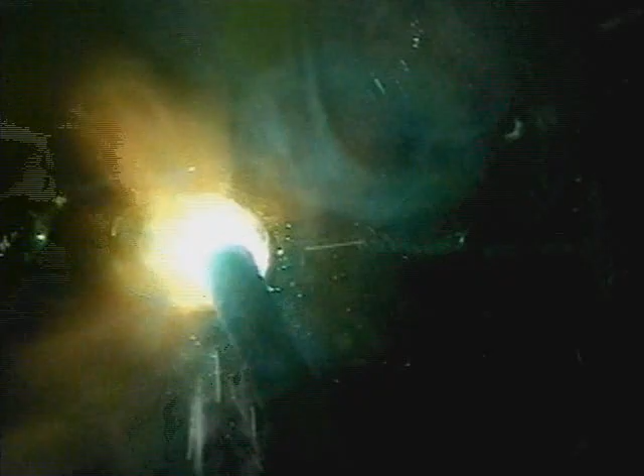Moving too slow will overheat the base metal. Long arcing will produce an inconsistent weld bead with excessive spatter. Everybody welds a little different, so watch other welders if you get the chance, and develop a style and rhythm of your own. Practice with different types and sizes of rods, and remember, arc welding is about making one good weld bead at a time.